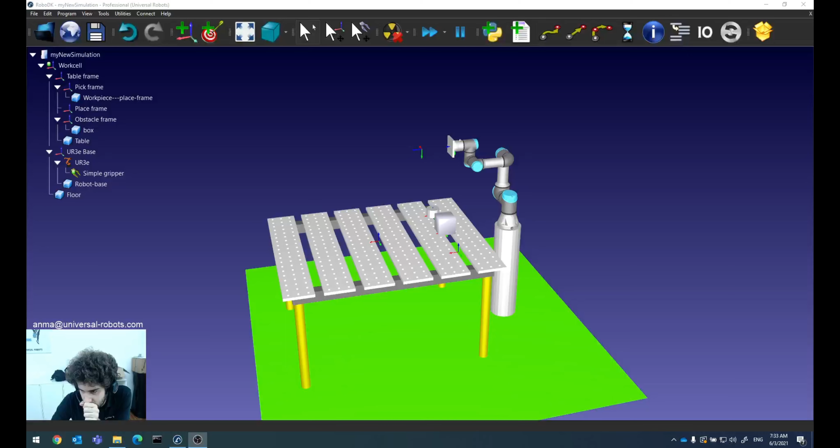If you remember, last time we positioned all the models that we created or imported from the RoboDK library inside our 3D world. So now we are ready to start telling the robot what to do. We are ready to create our simulation, programming the robot for its task.

Before actually doing that, we need to have a look at the robot, at how to move the robot, how to specify positions, orientations, and also we're going to have a very short look at the tool, how to create a tool, how to specify TCP, stuff like that.

So, if you remember last time when we were arranging the simulation tree, we just dragged and dropped this simple gripper, this geometry that we created, inside the robot, inside the UR3E. And it automatically got imported as a tool. So it was present in the simulation, but it was in another reference frame. Like for example, it was here in the table frame, and you can see it. It's just a regular object.

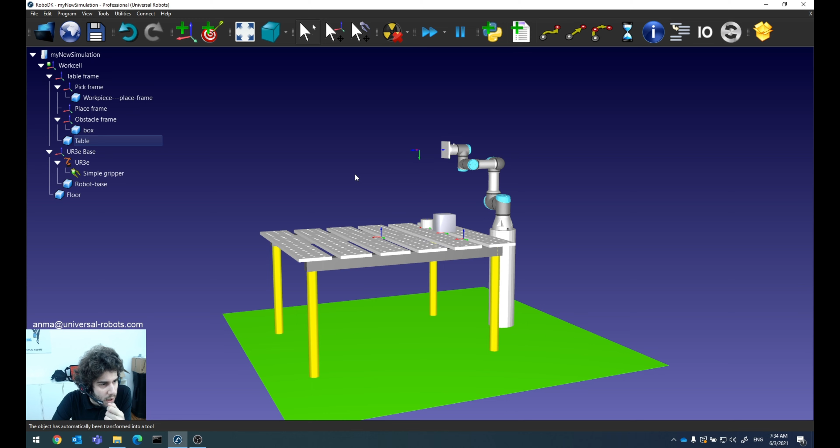When you drag and drop it inside here, you can see the object has automatically been transformed to a tool. So actually, RoboDK for the basic tools does all the work for you, or almost all the work for you. So actually, every object that is within a robot is automatically a tool for that robot. You can have multiple tools.

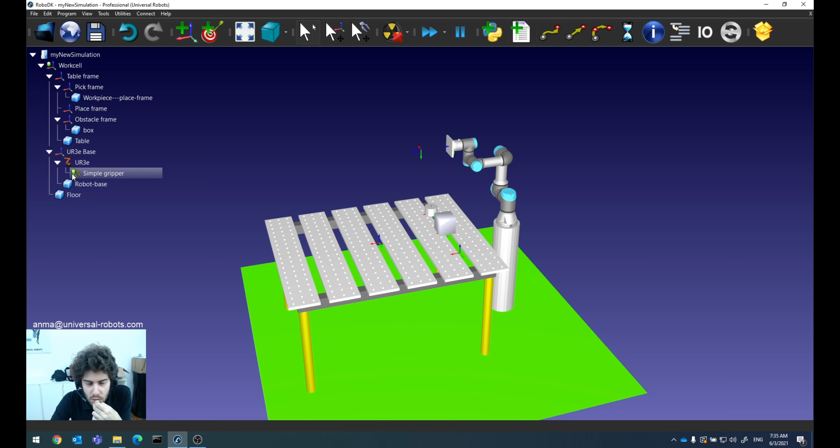The one with the green dot over here is the active tool. Okay, so it's the tool that the robot is going to use for whatever we are going to tell him to do. Just the same way as you could have multiple TCPs for the same robot in Polyscope, also here you can have multiple tools for the same robot.

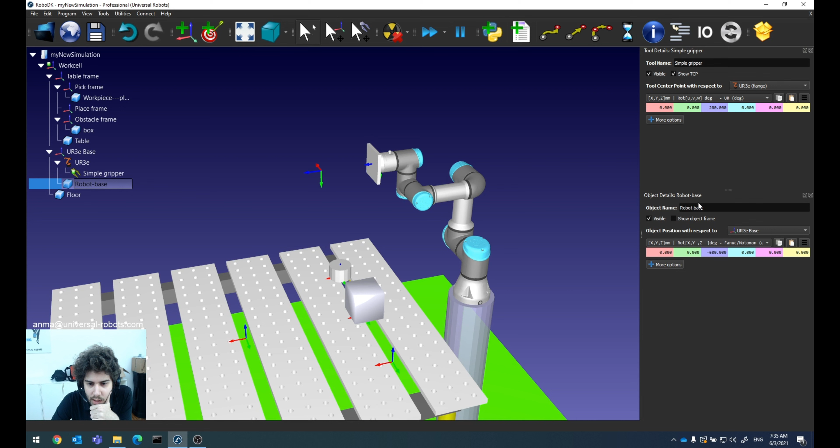Okay, when you double click on it, you will get the options that will allow you to customize this particular tool over here. And you can see that they are a little bit different from the options of a regular object. A regular object would allow you to position itself with respect to its parent. Instead, the option inside the tool is the option of specifying a TCP with respect to, in this case, its robot flange. So in this case, the UR3E flange.

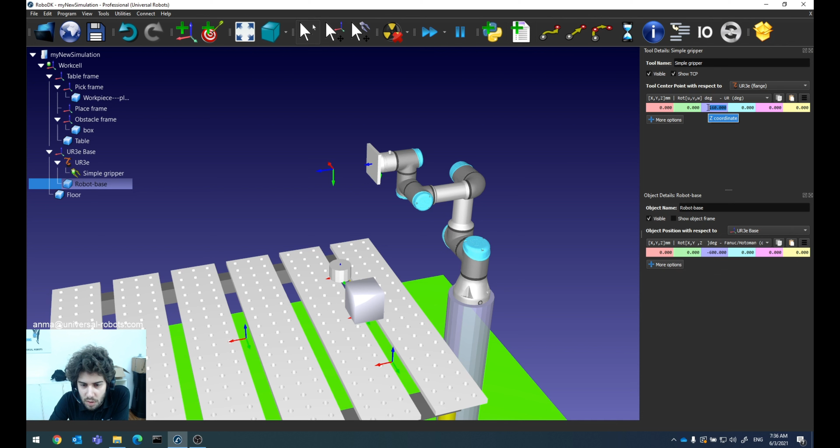You can see this reference frame over here in space is its actual TCP at the moment. It does not make much sense as it is right now, so let's correct it. If you remember when we created this geometry, the tool is actually 10 millimeters high, so we can just scroll down this value to the correct value.

But you can also check visually in case you do not know the exact dimensions of your tool. You can just adjust these values and try and correct them a few times until you get them right. So this is for positioning the TCP.

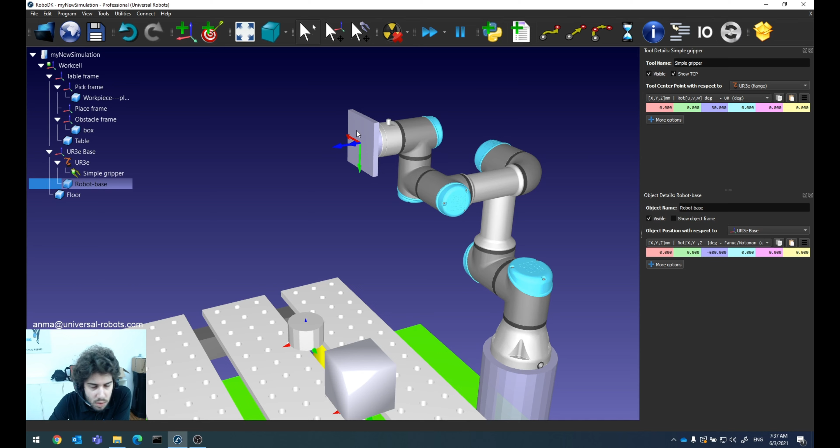In case you needed to move the geometry with respect to the robot tool flange, which I honestly do not usually advise. I usually advise to create your geometry, to transform your geometry so that the origin of the model is correct. It will actually coincide with the origin of the tool flange.

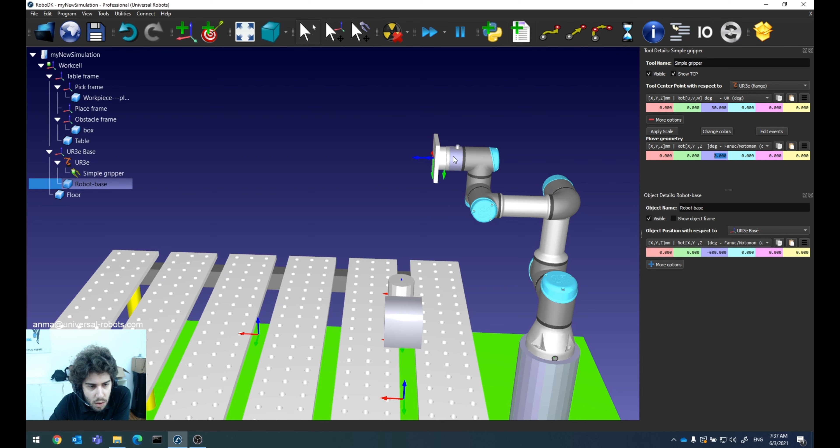Okay, so you don't need to move the geometry, but in case you wanted to move this tool geometry, you could click on more options, and this second position will allow you to move the geometry with respect to its reference frame. So you could actually keep the TCP fixed while moving the geometry, but I usually do not advise you to do so. But okay, this much is for the tool, so very, very simple.

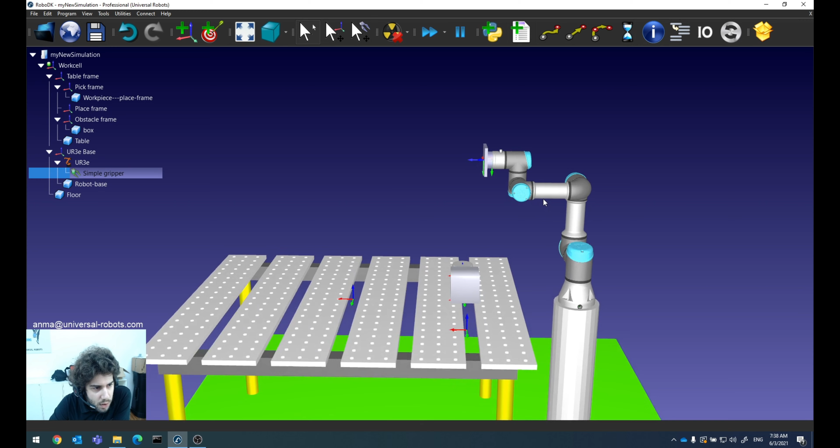I told you you can have multiple tools. Here, if you right-click, you can select whichever one you want as the active tool. Okay, once you have a properly defined tool, both geometry and TCP, and you made it active, if you double-click on the robot, you will see this panel opening up for you. You can see it's a little bit more complex than the one we are used to for objects and for tools.

What do we have here? We actually have a lot of stuff. We are not going to use all of it, so we're just going to have a look at a few parameters inside this one. You can rename your robot, first of all, here, in case you have more than one robot. RoboDK actually does it for you when you copy paste it, if I remember correctly, but in case you want, you can do it.

Here you can change what is the active tool, and you can specify its TCP. So actually what we did by opening the specific tool, you could do it directly from here. You cannot adjust the tool geometry from here, but anyhow, you should not be using that too much. So that should not be an issue.

Then what do we have? We have common movements for the robot. So basically, all this part is related to moving the robot in the world. Usually, what you do is you move the robot with respect to a reference frame. Here you can choose a reference frame, whatever reference frame you want.

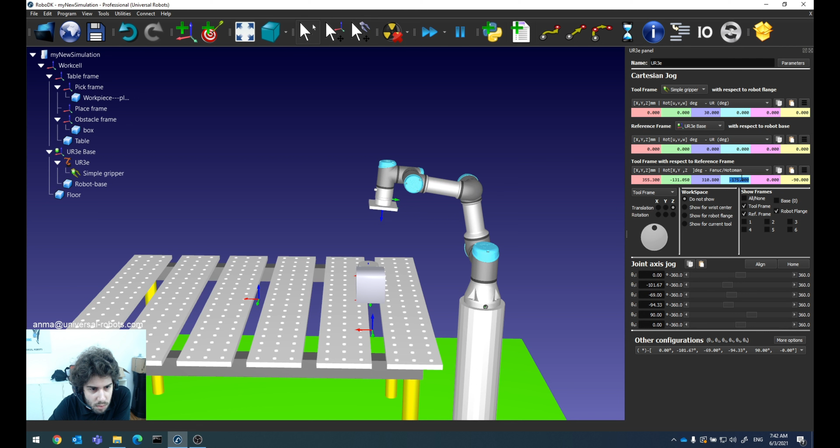press on this menu over here, to choose among a lot of different possibilities, different conventions. You can use quaternions, you can use our notation, like rotation vector. I usually feel very comfortable with the default one, which are Euler angles. So you can just get here and then change these values, which are in degrees in this case. But you can do however you are more comfortable. Okay, you can see that you can fairly easily adjust the tool position in space using this.

Another way to move the robot is instead using directly this little part over here. Here you can specify a reference frame that is either the tool frame, the reference frame that you specified above, or the robot base. And you can then pick a direction and scroll up or down. Both translation and rotation are available. So you can actually move the robot one direction at a time. So this is also useful.

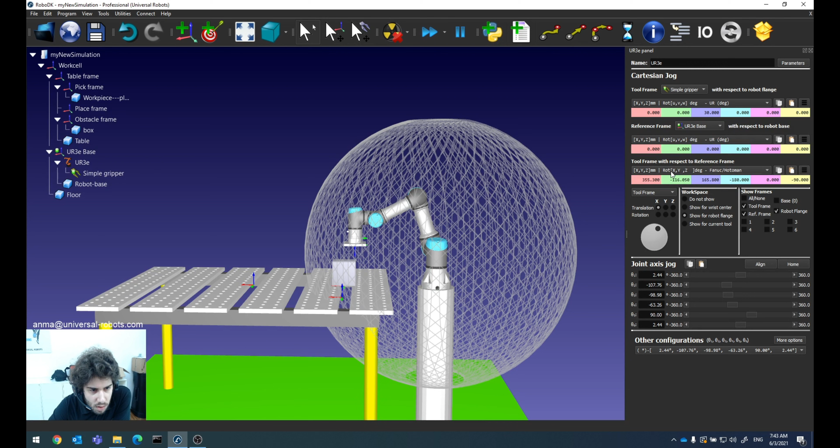This command over here will allow you to show the robot workspace. This can be fairly useful when you're configuring a layout; it's fairly useful to know if the objects are give or take within reach. But usually for programming afterwards, you keep it disabled. And then we have the possibility of moving the robot one joint at a time. Not very often used, but that's possible.

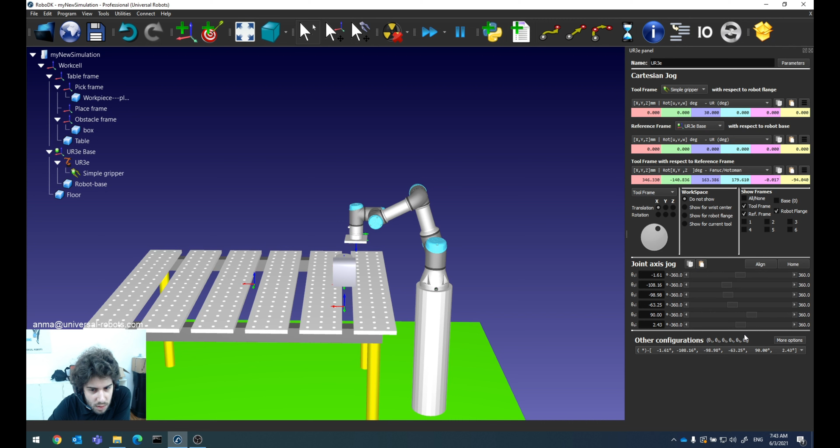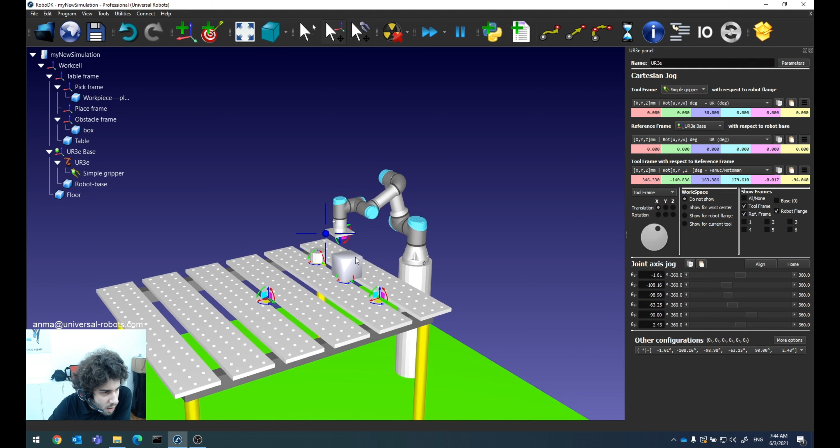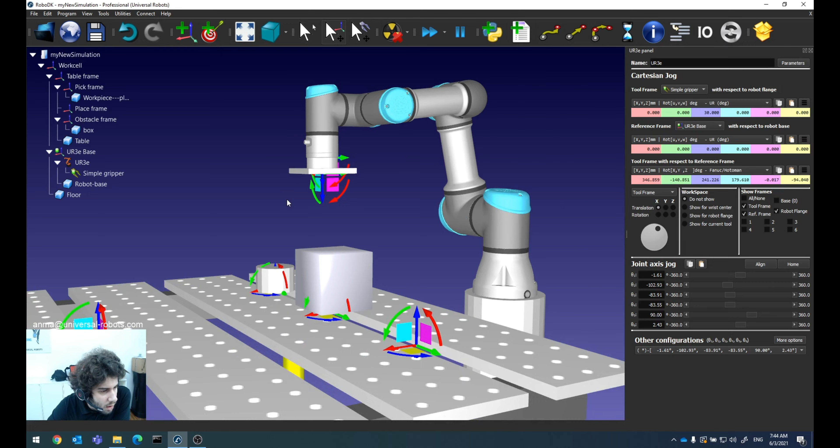Before looking at this part, the last way you can move your robot, which is actually a fairly convenient one, you can go over here and select this button over here. You will see that once you toggle it on, all reference frames will add a few arrows to themselves. You can use this command to move the actual reference frame just by dragging. So you can zoom, you can grab any of these arrows and you can use it to move the reference frame in space. If you happen to grab a normal reference frame, it will move itself normally. If this reference frame has any child, the child will move with the reference frame.

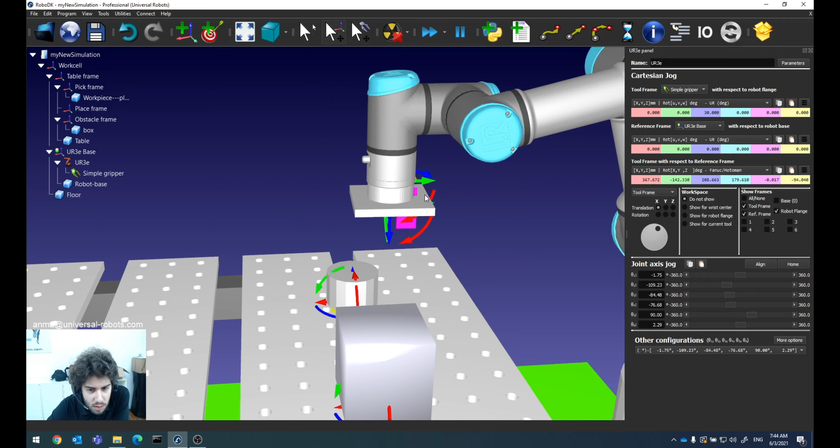If the reference frame that you are picking is the tool center point, the TCP, the robot itself will move so that it reaches the TCP's position that you are specifying. Also notice that there are straight arrows which allow you to translate the robot, and there are these curved arrows which allow you to tilt the robot. This is a fairly intuitive and quick way of moving the robot, so I usually use it quite a lot. It's not very precise, but you can always come here once you reach pretty much the point where you want the robot to go, and then adjust the values. So you can think of it as RoboDK's own version of our free drive function. Okay, so this is pretty much it for moving the robot.

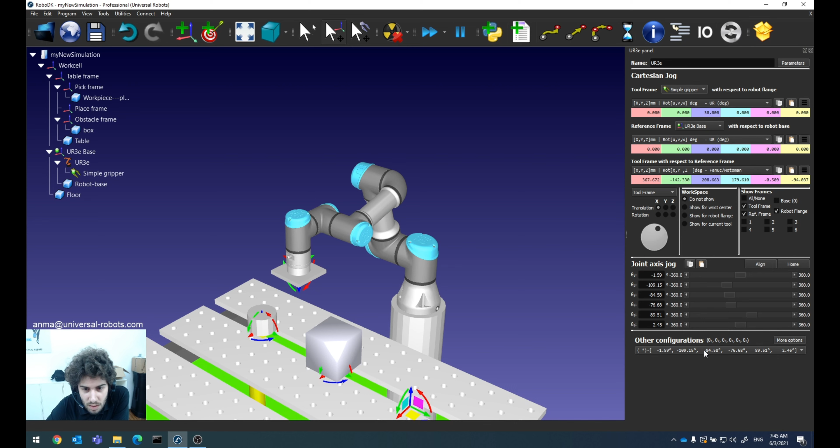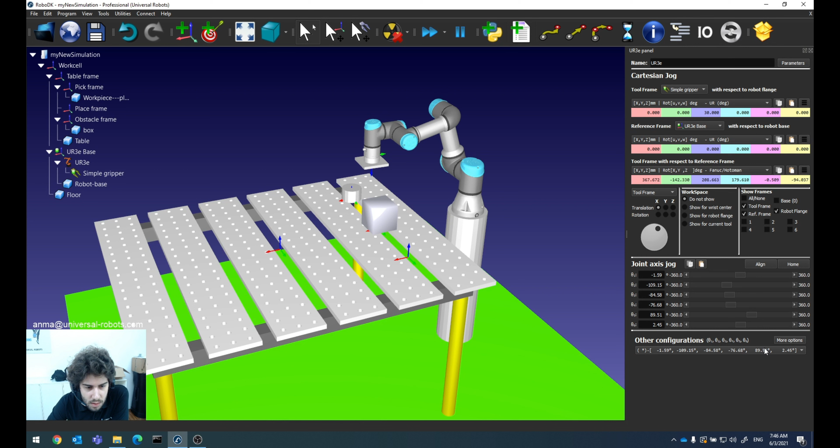The very last part that we're going to cover in this very short video is this one, because it's very convenient, very useful when you are adjusting or creating new layouts. As you can see here, it tells you other configurations, meaning you can choose other configurations of the joint coordinates that bring the TCP in this exact same position and orientation. You can just open this list. You can select any value from the list, and the robot will automatically bring its joints to the configuration that you specified.

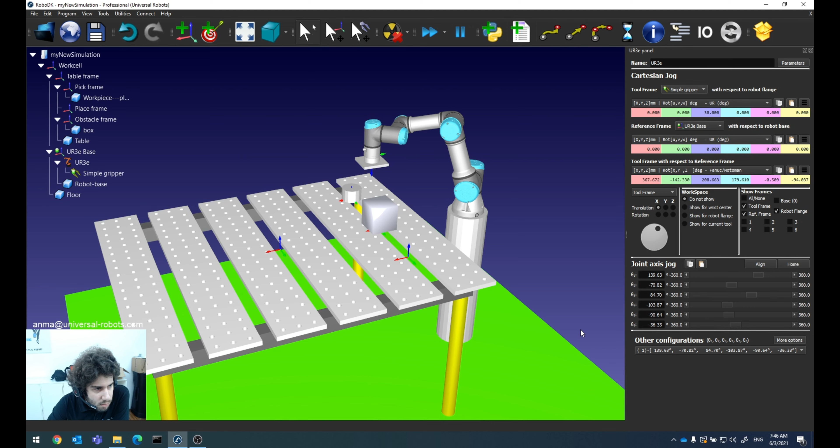In this case, actually, only few of them make sense. Actually, in general, only few of them will make sense. RoboDK does not check whatsoever whether these configurations are colliding or not with anything in the space for now. We will see later on how to do it, but for now, these are just all possible configurations that are within the joint limits.

This can be fairly useful in case, for example, your wrist or your elbow is colliding with something, or there is not enough room. It allows you to check very quickly what the other options are, to see if there is a feasible one that can do the job that you are trying to do. So especially when creating the layout, it's fairly useful for deciding the robot's starting position, the robot's starting configuration.

Okay, this could be pretty much it concerning how to move the robot, at least for now. Now we are ready to start actually programming the robots, creating the robot programs, specifying positions and stuff like that. But we'll do that in the next video.